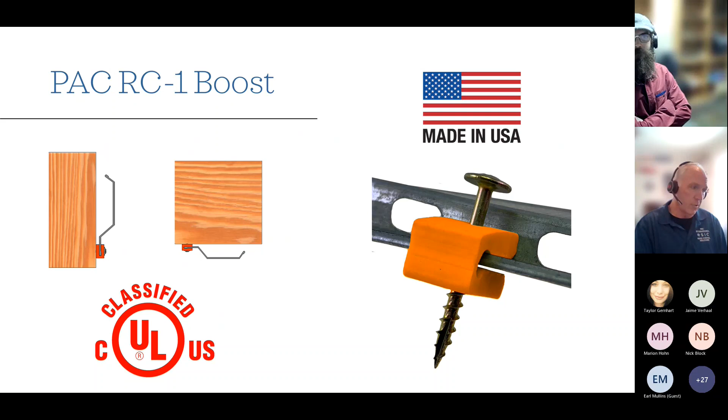All right, so RC1 Boost, what is it? This is a very simple product that PAC International developed about 8 years ago. Looking at the photo here, we've got a synthetic rubber bushing or damper, we'll call it, with a fastener, and that runs through your standard resilient channel attached to your structure. And this is a product designed to improve the performance of resilient channel.

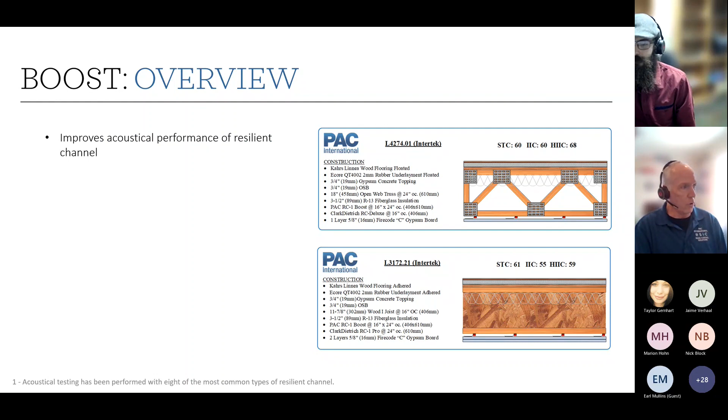So I'll just go real quickly through an overview of this product. We've tested this product on 77 UL fire resistive designs, mostly floor ceilings and some wall assemblies as well, and done quite a bit of acoustical testing on this product.

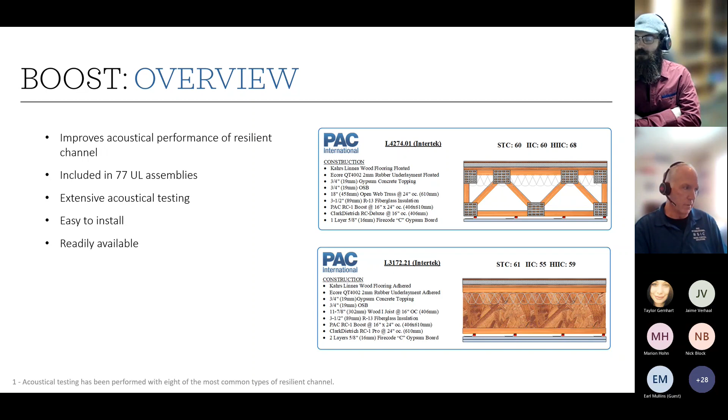This is a really easy to install product, and I'll show you a quick overview of that here in a second. And we keep plenty of this product in stock because it's really useful at overcoming some of the limitations around using resilient channel, and we'll talk about that in the case study. Works on walls and ceilings, as I mentioned before. We've tested this on 8 of the most common brands of resilient channel, including Clark RC Deluxe.

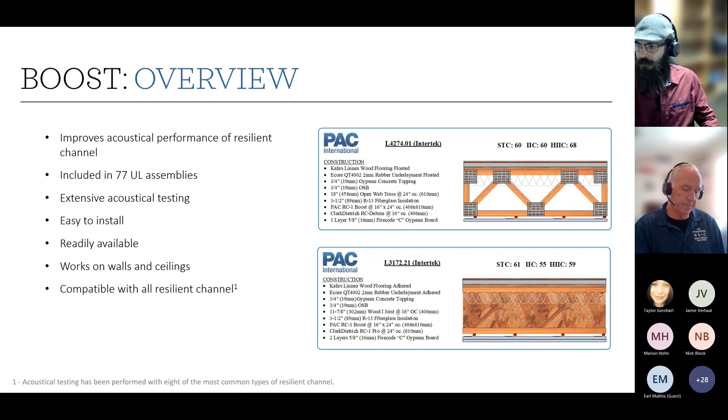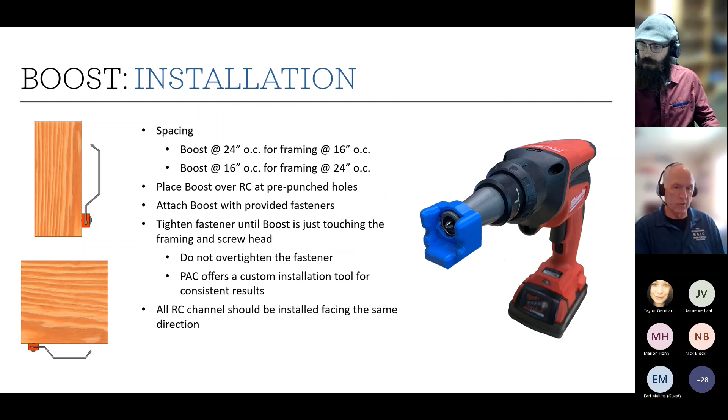Real quickly on installation. Again, very simple to attach. You just slide this over the edge of your RC at the pre-punched holes. Comes with the provided fastener for wood or for steel construction. We also provide an installation tool. The key part of getting the performance out of this product is making sure you don't over tighten the fastener, and the installation tool slips over your screw gun and allows you to fasten this into the structure at the right tension.

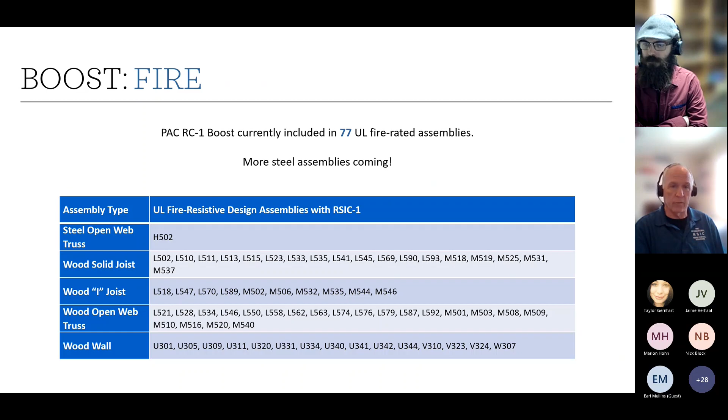Again, 77 UL fire resistive assemblies so far. Quite a bit on wood floor ceiling assemblies, wood solid joist, I-joist, open web truss, some wall testing, and we have one test on steel open web truss at the moment. We're planning on doing more steel testing for this product as well in the future.

Our code minimums are STC 50 and IIC 50, and quite honestly, that's inadequate. Everybody in the acoustics industry, all the acoustical engineers, and architects are familiar with the fact that the code minimum is not enough, and we need to push that minimum to a higher standard. And that's what we are doing in this industry, and we're continuing to try to champion that because we need to get these levels up to a higher standard.

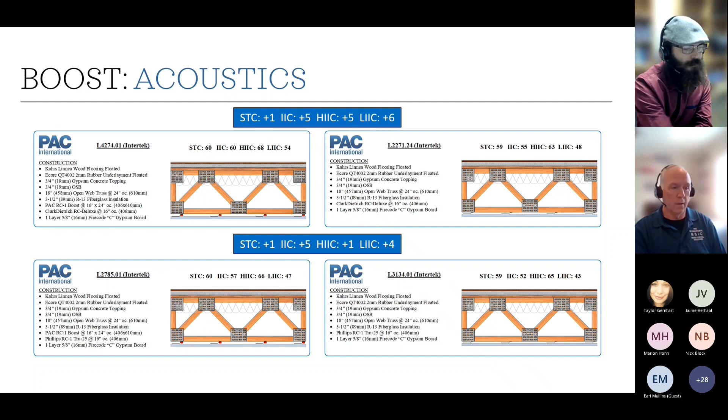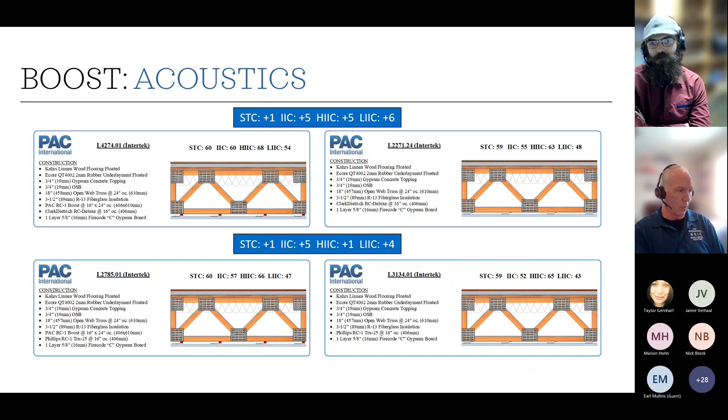We've brought up Phillips RC1 here, what we'll call generic RC1, because ClarkDietrich RC Deluxe is the performance standard for RC in terms of testing and performance on most assemblies. That's the go-to for most architects as a spec, and that leads us into some other issues that we'll talk about in the case study. But we brought Phillips RC1 up here to the same performance level, or very close to the performance level of the Clark RC Deluxe by itself on the structure. In fact, we beat it by 2 points on the IIC, if you look at the diagonal here of the two tests.

So again, one of the reasons that the RC1 boost is so effective is that we can bring up a lot of different brands to the same level of Clark RC Deluxe if it was standalone on the structure, and that can create some real savings.

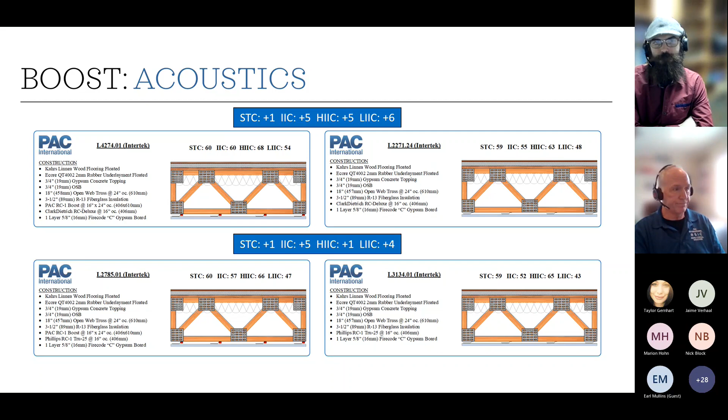So why that's important for designers and acoustical engineers, for everybody here: if we're designing with RC1 directly on the structure, and we're only getting an IIC 52 in a laboratory tested assembly, what are we going to end up with in the field? Most likely we're going to be below code when we get that installed in the field. So again, the goal here of trying to champion higher ratings is to give us some cushion, since we know we're going to lose something in the field. And so I think that's key looking at that here. If we take the RC1 boost plus the RC1, our STC, we're at preferred performance grade A.

And more importantly, our IIC has jumped up to 57. So now we've got 7 points over code minimum. And that makes me a lot more comfortable if I'm designing with a 57, knowing that I'm going to lose something in the field and still be above code, hopefully, when I get into the field, if everything goes correctly.

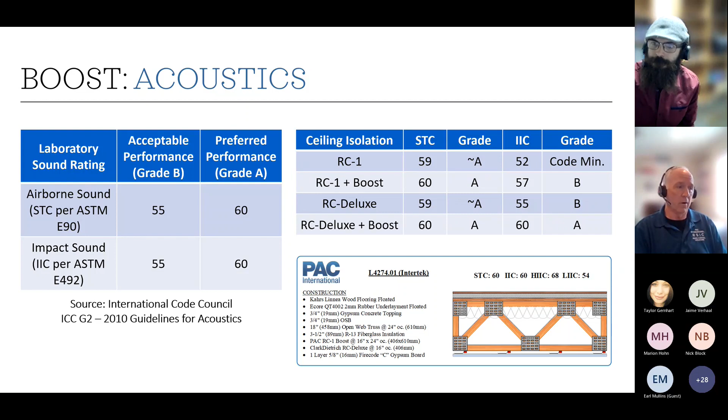RC Deluxe, straight to the structure, STC 59, we're at preferred performance, acceptable performance for IIC. If we add the boost to that, now we've got the Clark RC Deluxe to an STC 60 and an IIC 60. So now we're at preferred performance on RC Deluxe, 10 points over code. That's significant.

The last slide here, I want to talk a little bit about cost, because obviously cost is always a question and is always something that's going to determine how we approach an assembly. Base assembly, IIC 55, if we add the RC1 boost, that 5-point gain in IIC has cost us 17 cents a square foot. This is material cost only, by the way, this is comparison. And you saw how simple this one is to install.

Now, how do we do it if we don't use something like the RC1 boost? Common methods of improving IIC performance, alternatives to the RC1 boost, would be add more batt insulation. So add another layer of batt. That's costing us 62 cents a square foot for material only. And now you're looking at over three times the cost of the RC1 boost, and you've only picked up 3 IIC points over the original assembly.

Alternative to that, add another layer of drywall on the first layer, 47 cents a square foot for material cost. We've only gained 2 points of IIC here for a second layer of drywall. And if we factor in labor for adding more batt, or even worse, adding more drywall, now you're looking at a much more significant difference in cost. And again, to me, this is a slam dunk, and people out there who are using this would agree with that.

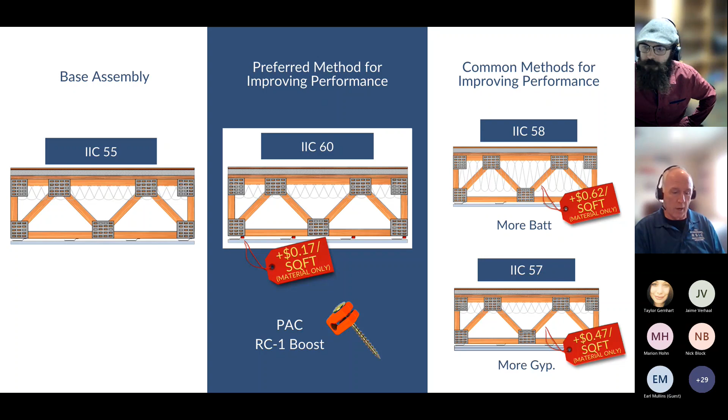So anyway, that's a basic overview of the RC1 boost. If people have more questions about this product, we can talk about it more at the end after we talk about the case study with Zach and Nick. But this is just to give you an overview of what this product is. And this is going to take us into the case study, which I'll open up here for you guys.

Can everybody see my screen still? Mike, I think you're muted there.

Yeah. Okay. So this is a case study document that we created, and I'm not going to read any of this, but we're going to open this up to both Zach and Nick and have them talk a little bit about how they came to find the RC1 boost and what it did for them. Zach, if you want to start it off and give everybody an overview of this particular project, the Novel Ballantyne project, and a little bit about Crescent Communities. Go ahead and introduce yourself too, and your role with Crescent Communities.

Yeah, so I work for Crescent Communities' in-house builder, Crescent Communities Construction. I'm the project manager on the Novel Ballantyne project. The situation that unfolded out here with our RC1 boost clips was we could not get RC Deluxe due to product availability. So we made the swap early on in the project to use RC1 with the boost clips to maintain the acoustical performance and compatibility with UL.

So when we got around to inspection time, our fourth floor inspection on the first building had the boost clips installed, and the inspector's interpretation was that only one resilient channel section could apply on the UL, although the boost clips were noted as optional. So I got on the phone with customer support over at PAC, and they helped us coordinate with UL to get the letter we needed for the inspector to sign off and allow us to keep moving. So everything was compatible, and PAC helped us minimize the time lost. We got moving within the week.

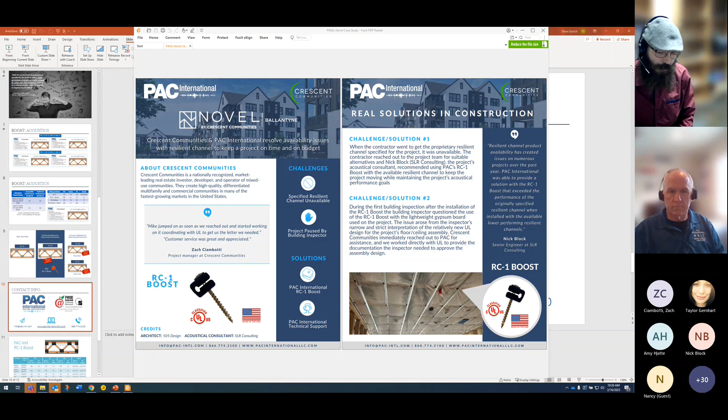And I think with anything, like we've got some other contractors. We've got one out at East that's done hundreds of thousands of these now. They've been using them for years, and like anything, as you get used to it, you kind of understand how to do it. You get into a rhythm with it, and the installation goes a little bit faster. But it's good to hear that initially it was still pretty easy to do.

And the cost comparison between sort of generic RC and Boost versus RC Deluxe is something we've talked a lot about here internally. We've really kind of decided not to make those comparisons because pricing can vary so much regionally and even just day to day, especially with material prices now. But it's interesting to hear that even with the additional labor, the Boost Plus RC came out the same or a little cheaper than RC Deluxe for this project.

Yeah, like you mentioned, that's all variable. I mean, this time last year, no telling where the market was compared to now. So I don't know that that's necessarily a standard, but that's what we saw on our buyout.

Yeah. Okay. Well, and with the product availability for the Deluxe, Nick mentioned he's seen it on other projects. Is that something that you're running into a fair bit, Zach, where you're not able to get it or not able to get enough of it? We've talked to some of our drywall distributors that we work with. They said they've been on allocation for it. Is that something you're running into regularly, or is this kind of just a one-off situation?

So it seems like a one-off situation to me. I actually had a conversation with our drywall trade the other day that asked if they could switch back to the Deluxe because it was available and costs were coming down on it. So I don't think it's been a recurring thing for me, but it's nice to be able to address the issues as they come up and have an alternate available.

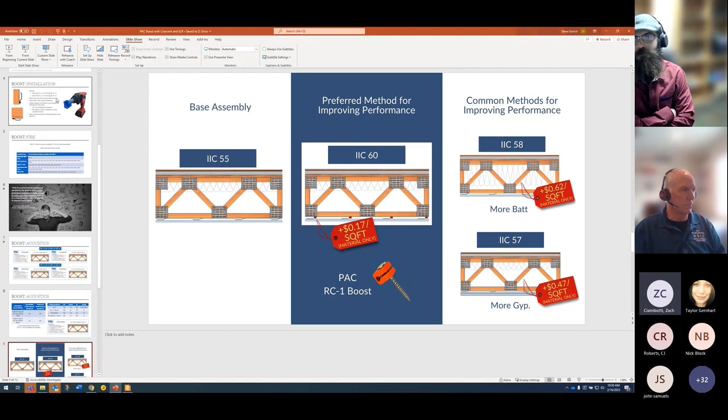And Nick is correct that the double stud walls do not get RC channel. The only walls that we do out of RC are the corridors on this project. Okay, so your corridors are single stud with resilient channel? Yep, that's correct. And for those, are you putting the resilient channel on the corridor side or the unit side? The corridor side. Okay. Yeah, because often if you're putting the resilient channel on the unit side, then you have to deal with cabinets or mounting other things, and that can be problematic mounting with the resilient channel. But of course, if you put them on the corridor side, then you have to deal with shear panels most of the time. So sure, yeah.

How do you deal with that for the shear panels? By having to move it to the inside. And then how do you deal with cabinets? There's a couple of details that have been created over the years for putting a piece of sheet metal in between extra resilient channel for the cabinets to then be able to fasten into. There's kind of ways of bolting around that for the cabinet supports or for grab bars for handicapped accessible bathrooms.

Yeah, so it's not ideal, and most of the time these will be located in areas where a slight decrease in performance because of that additional support could be marginally acceptable. But either way, it's not ideal. It's better if you can do the staggered stud in the corridors, kind of avoid that issue to begin with.

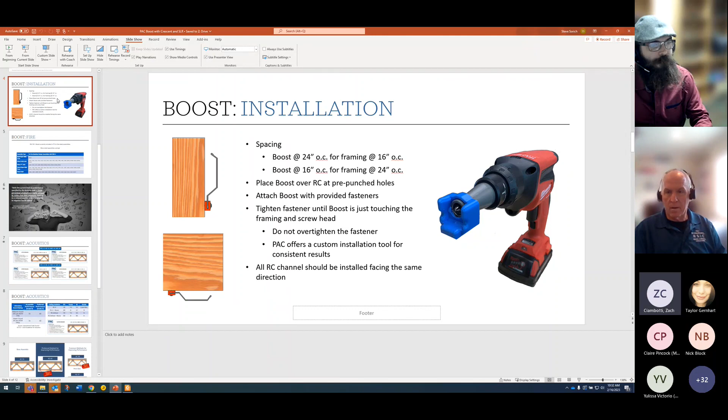Yeah, I think the short answer from the construction side is that's what we've got the framing superintendents for, and we make sure we check all those critical openings before we move on and account for every part and piece in it. So there's always plan coordination between sets. Everyone does their best to make everything match up, but at the end of the day, that's why these superintendents are out here, and that's what they're looking for.

Yeah. So since we've gotten into it, we do have another product, the PAC RCB, that's an isolator to provide an isolated backer for cabinets and other heavier items like that, which works with resilient channel. And I guess Nick, you and I have been remiss in discussing that one with you. But yeah, we've got that, and we've got test data for it in our database too. So something to consider there.

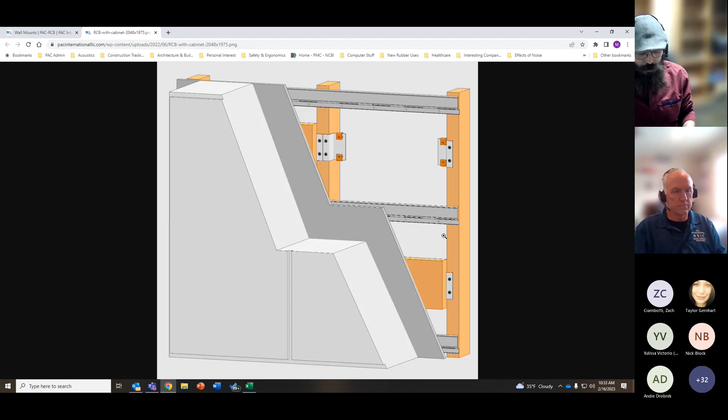We've kind of already gotten a little broader here in the conversation. So our intent with this was to introduce the Boost product, talk about it, and then talk about this particular case study, some of the issues that came up there. And then, since we've got Nick and Zach here, and a lot of other folks with a lot of experience in this, I wanted to just open it up to a broader conversation.

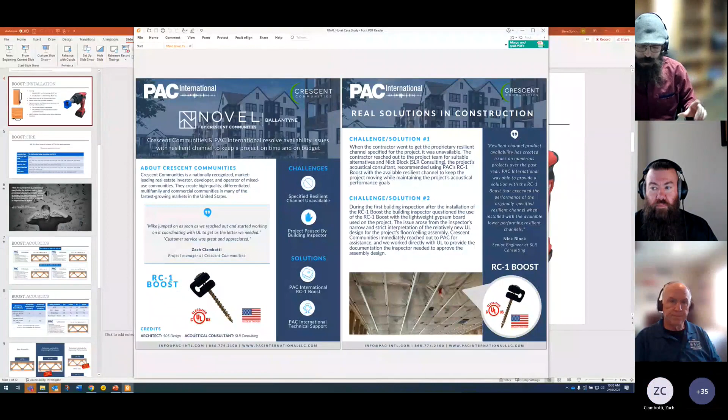Yeah, and in the open web truss assembly specifically, in the UL designs, the Ulix is like its own item for gypsum board, an alternative type of gypsum board. And it references a specific line item for resilient channel that's different from the standard resilient channel. So in the list of all the different ceiling support structures, resilient channel might be item 6. 6A might be the RSIC-1, 6B, 6C, different clips and things like that. And now in UL L521, which I think is what they're using here, there's a 6I or something like that that is resilient channel specific to Ulix gypsum board.

And so the building inspector was interpreting it that Boost could only be used with the standard resilient channel, not the resilient channel specific to Ulix. So that's why they paused the project. So we reached out to UL and got their interpretation: yeah, you can use Boost with either of the resilient channels. It's just a broad statement, not specific to one listing of the resilient channel. So we got that confirmation from UL so the project could keep moving forward.

And we are in progress right now with UL to get that clarified. Basically it's just, I think, adding an additional statement in that line that says Boost can be used with resilient channel item 6 or 6I or whatever it is. So it's a really simple thing, just stating it explicitly instead of implicitly. So that was the issue here. We spend a lot of time doing UL assemblies and digging into all of that, so when those issues do come up, we've got an open line of communication with UL, and we can usually get those things resolved fairly quickly, like we did here.

We got a question from Matt Kinch. Yeah, go ahead, Matt.

So I work with Nick over at SLR, and Steve touched on something that we find very important as well: even though a design looks to meet the code minimums by a point or two, we've done enough field testing of assemblies, and our results indicate that field tests might be anywhere from an IIC 43, 44 up to a 46 with just standard assemblies. So anything to get us that extra buffer, so that if a local code official says, okay, prove to me that you've met your code minimums, we feel comfortable with the RC Boost or other strategies to ensure we're meeting code minimums at all locations.

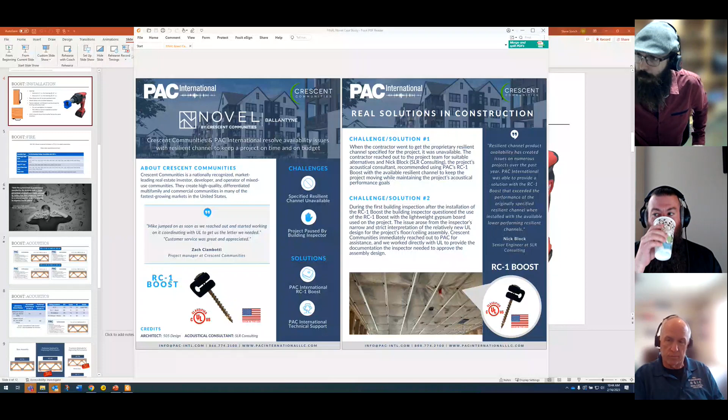Yeah, we're still working on some agreements in that area for Canada nationwide distribution. We're not there yet, but it's something we're actively working on. So hopefully we'll get there soon.

Yeah. There's another question, Mike, from Yvonne de Hamel. How would you compare in price RC Deluxe plus Boost versus RSIC-1 or the RSIC-1 sound clip? Oh, so RC Deluxe plus Boost versus the RSIC-1. That's a good question. We haven't done a cost analysis of that, but Zach, if you used clips, either the RSIC-1 or other clips for that matter, on projects like for amenity spaces like Nick mentioned, you might even have a better idea of real world pricing for that.

I mean, my assumption is that the RSIC clips and hat channel will be more expensive, and by a decent margin, than RC Deluxe and Boost, because I think hat channel itself is the same or more than RC Deluxe, and then the clips are more than the Boost. So there's definitely a price difference there.

One thing to keep in mind is the Boost, when you're installing it per the UL fire designs, you use a Boost isolator at every point that you're fastening the resilient channel to your structure. So it's usually going to be 16 inches by 24 inches on center. Either your structure is 16 and your resilient channel is 24, or your structure is 24 and your resilient channel is 16. With clips, you're typically at 24 by 48, or usually 16 by 48 for fire rated assemblies for floor ceilings. So you're using fewer clips of the RSIC-1 than you are the Boost.

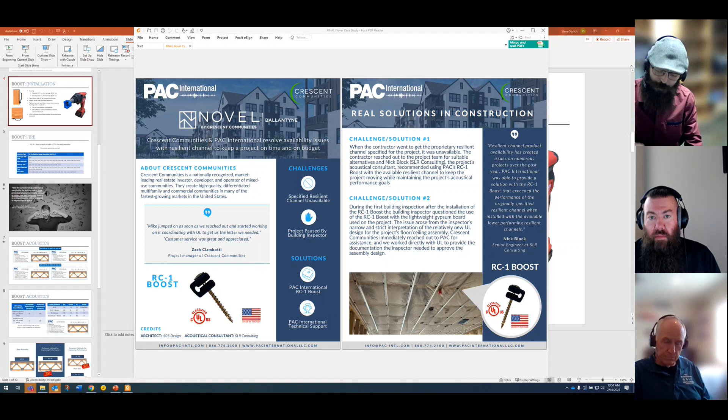And Tim, you said slab on grade can be a devious one too, and you're right. Especially for heavyweight impact for gyms and things, you can still get a fair bit of transmission up through the structure, or even laterally to adjacent spaces. I've had issues. So it's certainly usually better than an elevated slab, but it's not a panacea. So fair point there.